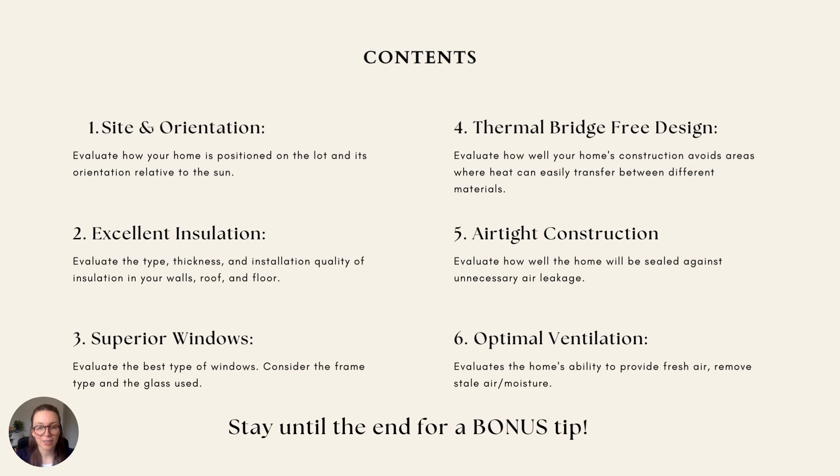The first key principle I want to talk about is site and orientation. It refers to the placement of your home's location on the site and the relationship to the sun and the prevailing winds. There's some key factors that you'll need to evaluate, such as shading, the prevailing wind direction, and opportunities for passive solar heating over winter. You'll also need to consider natural ventilation and cooling in summer.

The strategic placement of your home can dramatically impact its energy efficiency. Facing windows to the sun will capture the winter sunlight for warmth, while well-placed eaves and shading devices can shade your home from the hot sun during summer. The prevailing winds can be used to naturally cool your home. Analysing your site is crucial for a sustainable design, and that is why I start here first.

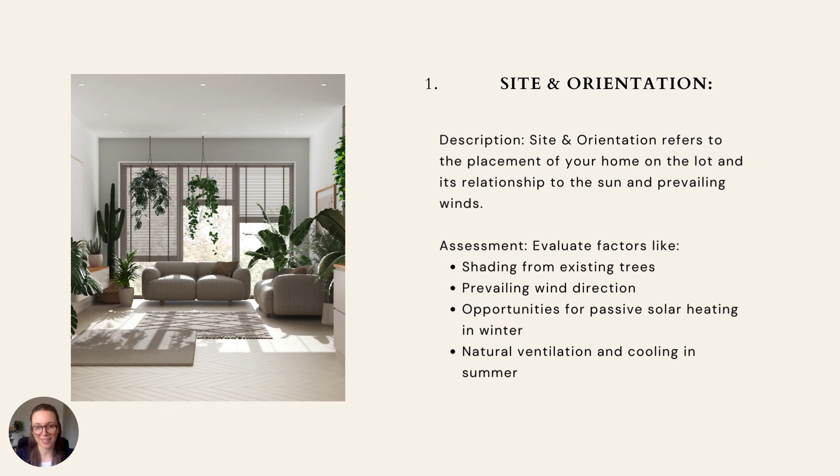When we think about site and orientation, there's some key questions I want you to ask yourself. Where does the sun rise and set in relation to the rooms in my home? How does that change from summer to winter? Is there any shading from existing trees?

Now, this can be something that's a good thing because the shade in summer can block the hot sun from coming into those rooms. However, too much shading in the wrong location in winter can mean that you're not getting any sun into the home. This can lead to a home that's feeling quite cold throughout the year.

There's a type of tree called a deciduous tree, which means that it drops its leaves in wintertime, compared to an evergreen tree, which keeps its leaves all year round. Deciduous trees can be ideal energy efficiency devices. They can be placed in a location where they can block the summer sun when they're full of leaves, and then they'll drop their leaves ready for winter to allow the winter sun to come inside.

Even an apple tree or a cherry tree are examples of deciduous trees, which not only provide the shading in summer and the sunlight in winter, but also give us delicious fruit as well.

It's also good to consider what the prevailing wind direction is. If we can optimize the location of windows in the home, then we can allow them to be open to receive the cooling breezes in summer. This gives us some extra thermal benefit because it means that we don't have to spend money on using an air conditioner to cool our home over summer.

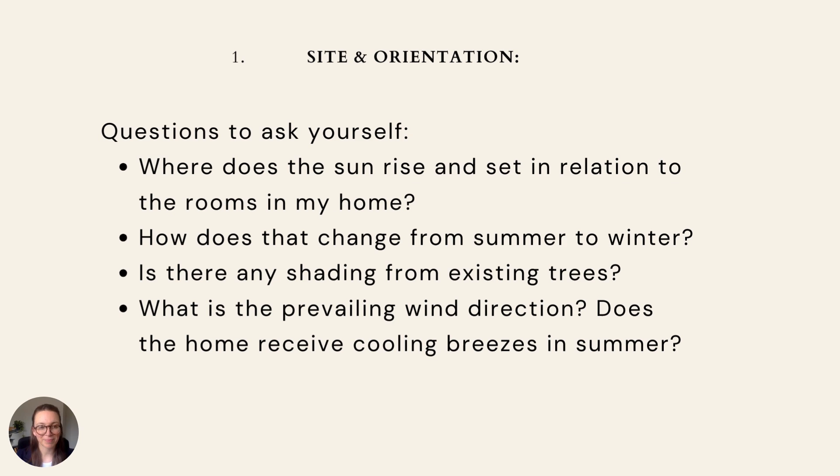The next principle I want to talk about is excellent insulation. This is crucial for maintaining comfortable temperatures inside your home. There's many different types of insulation, and so I'm going to cover some of the key principles here. The main one I want you to think about is called the R value, which is a measure of the resistance to heat flow. All insulation has an R value. In fact, everything has an R value, but we use the metric of R value to measure the insulation levels. Higher R values equal better insulation.

You need to look for potential gaps or holes in the insulation. Where there's too many gaps, that actually has an effect of lessening the impact of the insulation. These gaps mean that the heat or the cool you've created inside your home is allowed to transfer out, which we don't want. Ideally, we want your home to perform like an esky.

An esky in a hot Australian summer is taken down to the beach, and it allows us to keep our drinks cool inside while it's hot and scorching summertime temperatures outside. And then at the same time, if you take that thermos and you put a lovely hot chocolate in there in the middle of winter, then the thermos actually acts as a way to stop that cold temperature from outside coming in and cooling down your hot chocolate. This is exactly the same kind of insulation principles that we want to include when we're thinking about this in our home.

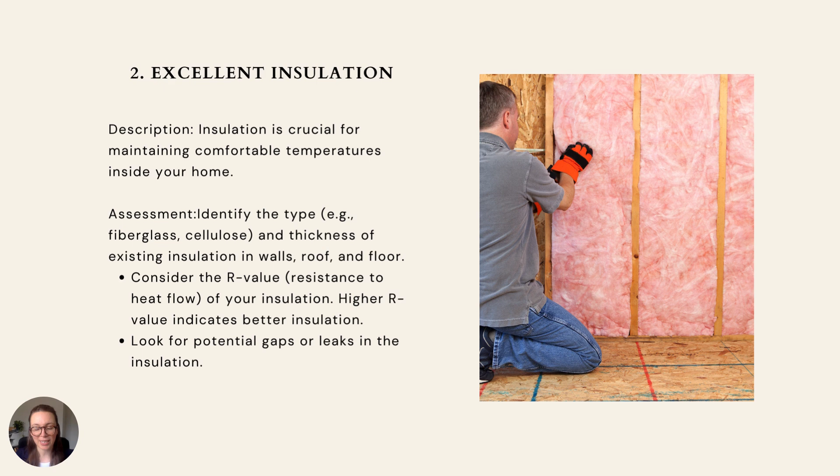Ideally, it's really important that the insulation is continuous, meaning that we're trying our best to get a continuous line of insulation from the floors, the walls, and the ceiling all around us, in the same way that if you cut an esky straight through the middle, you'd see that wall of insulation, floor of insulation, and then the ceiling of insulation, keeping whatever you've got inside hot or cold as it's required.

Ceiling insulation is so important because, as we know, heat rises. So the heat that we're generating inside our home is going to rise up, and that will come to our ceiling. So the most benefit we're going to get from topping up our insulation is going to be at the ceiling point.

The next, perhaps more expensive option might be to look at improving wall insulation. I had a great question come in about this recently from a client, and they were asking how to do wall insulation in their existing walls.

As I said, it's hard to do unless you're looking at taking off some of the plasterboard internally, because you need to get access to the structure, or unless you're looking at taking off the external cladding of the home so you can get a good level of access to the wall frame to be able to install that insulation retrospectively.

And then the third most expensive option I want to talk about here is subfloor insulation. Now, it's not always true that it's going to be the most expensive option. However, I've included it in this case because I believe that the subfloor insulation can be hard to access. So that means that trades may charge you more for subfloor insulation installation. You need a certain amount of clearance underneath your house to be able to install insulation.

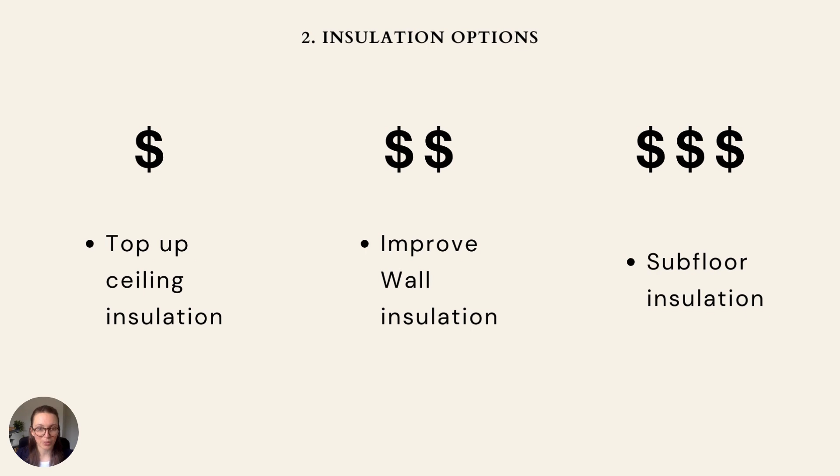Now, the next principle I want to talk about is superior windows. Windows play such a significant role in managing the heat gain or loss. I always say to my clients that you need to think of windows as holes in your wall, because that's essentially what they are in terms of thermal performance. They are a hole in your building fabric, an area where you can't get the insulation that we talked about in the previous slides. So the performance of the windows becomes even more important.

Windows are absolutely beautiful and so important in architectural design. But where they are placed and how big they are sized has a huge impact on how sustainable and energy efficient and comfortable the home will be. So I believe it's so important to think about how we are designing our windows and make sure we design them in terms of size and placement, to think about where the sun's going to be coming into the house throughout the day, where the views are going to be located, and also which height we will be looking at the views.

For example, if you're sitting at a desk all day and you want to have a window in that room, that's a different height to if you were looking at a room where you might be standing most of the day. There's different views that you'll get from your eye level to be able to connect yourself to the nature outside. It's so important to have beautifully designed windows. It's one of my favorite things to talk about.

The key aspects in terms of energy efficiency of windows is to think about the frame material. So there are many different types of frames. One common one that we see in Australia is aluminium frames. Single glazed aluminium window frames are not a good option for windows, and it's unfortunate that we still see them being installed in Australia and in some other countries as well. These type of windows are not very good at keeping the internal air temperature at an acceptable level. The reason is mostly because of the frame material itself.

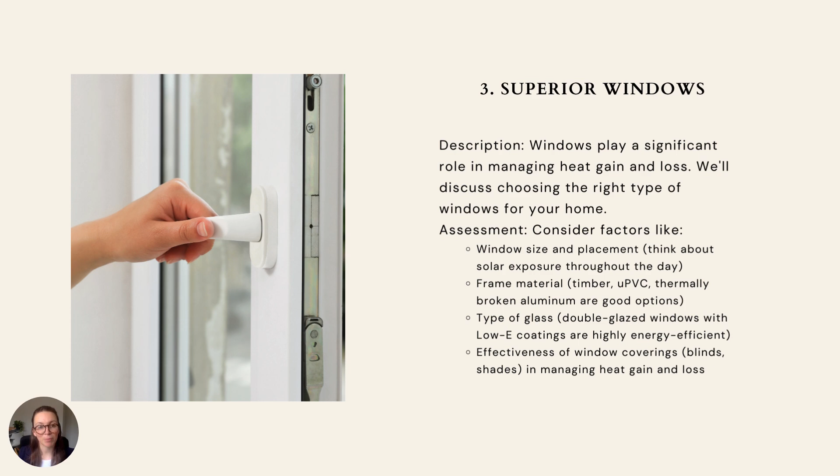Some other things to think about would be different types of blinds and shades that may help to insulate the window, such as honeycomb blinds. And when we talk about shades, we're looking at external shades, because our main thing to do in summertime is to make sure that we don't have the sun hitting the glass. When the sun hits the glass and gets into the house, then it's going to be heating up the internal environment. Ideally, we want something that's shading the glass on the outside. That could be a shade that rolls down or rolls out to protect and block the sun. Another option, as we talked about before, is the placement of deciduous or shaded trees that block the sun coming in summertime.

Let's talk now about a few of the different levels of window options and how they might be affecting the different prices. So, as I mentioned just previously, one of the cheapest options you can do is adding pelmets and heavy curtains to your window frame. Now, when we think of pelmets and heavy curtains, we might think of a more heritage style home. However, there are contemporary ways that we can bring in these elements. It's essentially going to create that layer of insulation on the window, as I said.

The next thing I want to talk about is improving the window frames. That will increase the cost of the windows. Looking at timber windows or UPVC. UPVC is something that's growing in the Australian market. It's very common, I know, in Europe and America. These options allow the window frames to have a good level of insulation, meaning that they won't be transferring the heat from inside to outside as quickly.

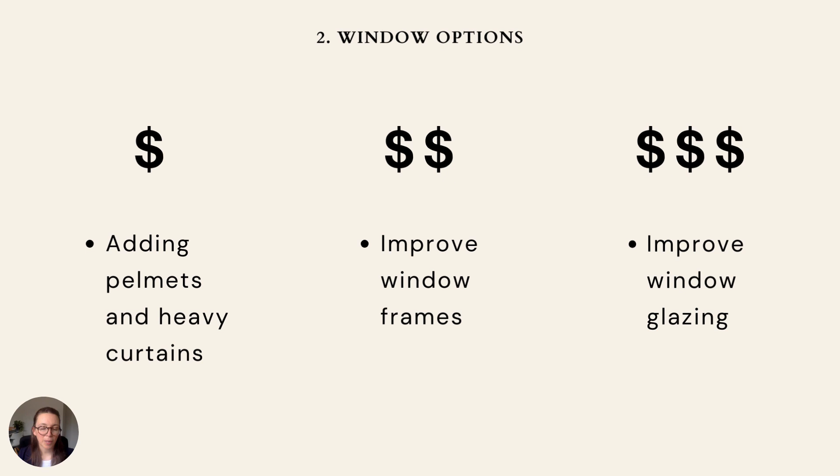And then finally, perhaps the most expensive option here is to look at improving the window glazing, going to double or potentially triple glazing in some climates. There are some other options to consider here, such as secondary glazing, which is about 1/3 the cost of double glazing, where additional perspex elements are attached to the window frames. That may be something to consider for your situation as well.

Next, I want to talk about thermal bridge-free design. These thermal bridges are areas in your home construction where heat can transfer between different materials. We've talked about this already. It's a little bit of a physics lesson today. We really want to minimize the heat transfer through considering thermal bridge-free design in the way we're looking at constructing or retrofitting our homes. Thermal bridges can create energy leaks, and so by addressing these areas during construction or renovation, you can significantly improve your home's thermal performance.

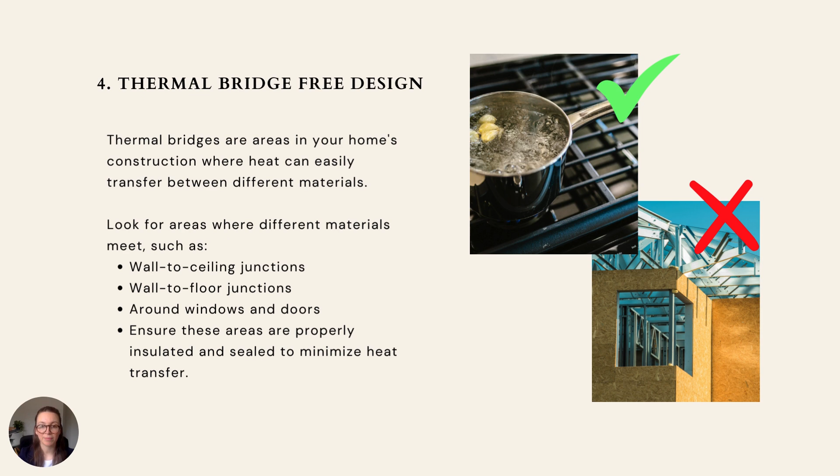Proper insulation and sealing techniques around any thermal bridges will help to prevent them from transferring the temperatures outside to the temperatures inside. It's really important that we consider the use of aluminium and steel. These can be used in the home design, but it's really important to think about where they're used and to make sure they are thermally isolated. They're both materials that transfer the outside temperatures to inside more quickly than perhaps timber, for example.

Next, I want to talk about airtight construction. A well-sealed home is crucial for optimal performance. Addressing air leaks reduces your heating and cooling needs, it saves you money, and it's creating a more comfortable environment to live in. It's really important to evaluate how well the home will be sealed against unnecessary air leakage.

By that, I mean that when you have air inside your home, it's not escaping through gaps and cracks that really don't need to be there. One of the concerns about air leakage or perhaps air coming in from these gaps and cracks is it may be coming from spaces that are not necessarily outside natural air. It may be coming from the wall cavities or from the ceiling spaces.

What's concerning about this is that there is a level of dust, there's a level of rodent droppings, there's probably rodent carcasses, any sorts of things that could be stuck within the wall cavities or in the ceiling cavities. And so if we are pulling air from those areas into our home, that's going to affect our indoor air quality.

When we think about bringing in air to the home, we want to make sure that it's air that's coming from outside. It's natural air and air that's going to be fresh. That's so important for our health. So it's really good to seal up any unnecessary gaps or cracks with caulking material. Pay particular attention to the seals around windows and doors. They are notorious spots for air leakage coming into the home.

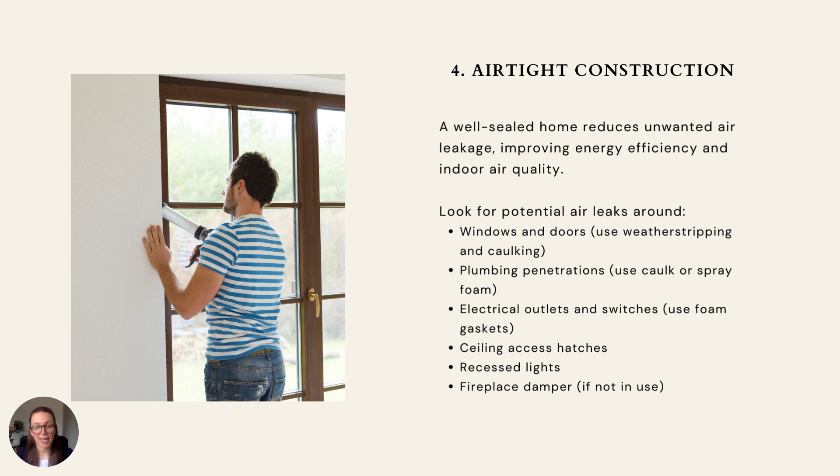Now we are creating homes that have much more efficient technology in how they're going to be heated, and they don't need this level of leakiness anymore in order to be efficient. They're essentially assisting us to create a healthier indoor air environment than a fireplace would, for example.

Finally, I want to talk about optimal ventilation. This links to the previous topic because it's so important that we have fresh air that's coming into our home. Our home is a source of stale air and moisture-filled air that can build up when we're cooking, when we're showering, from the toilets, from any internal breathing that we're doing, essentially. As we're breathing out this carbon dioxide, we need to make sure that we are pulling those contaminants out of the air and providing fresh air circulation.

There's no reason why we should have to live in homes that have stale, moisture-laden air. So it's really important that we can focus on these principles for optimal ventilation. I'm always going to promote natural ventilation first. In Germany, there's a principle where every day they will open their homes for a few minutes to let that fresh air in, even in the depths of winter.

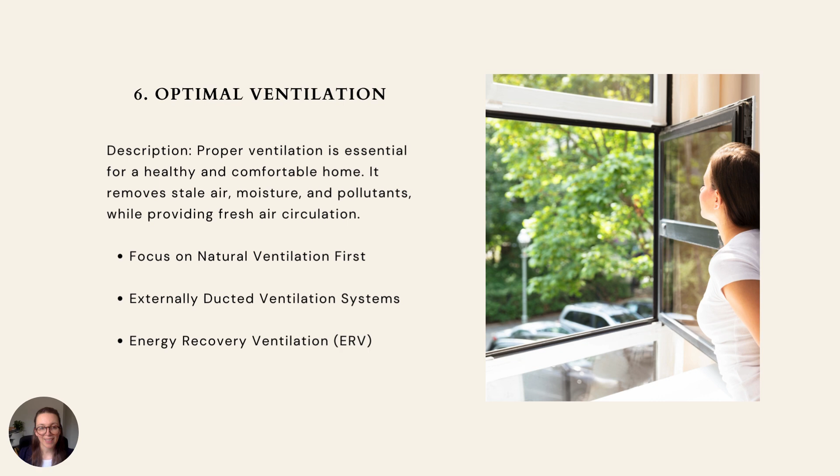And I love this principle because it just allows the air in the whole home to essentially be swapped over for fresh air and ensures that there's no buildup of moisture or stale or stagnant air in the home. Then you can look at different types of systems, which I'll cover a bit more on the next slide.

There's also some systems which are called continuous extraction. They are essentially running a small fan all the time, which is pulling the stale, moisture-laden air out of the home. And that can be accompanied with trickle vents or specially detailed openings, which will allow for fresh air to come into the home. As I said previously, we don't want to get any of that air coming into the home from our wall cavities or our ceiling spaces. We want to make sure it's fresh outdoor air. And this is one way that we can do that when we're using a continuous extraction system.

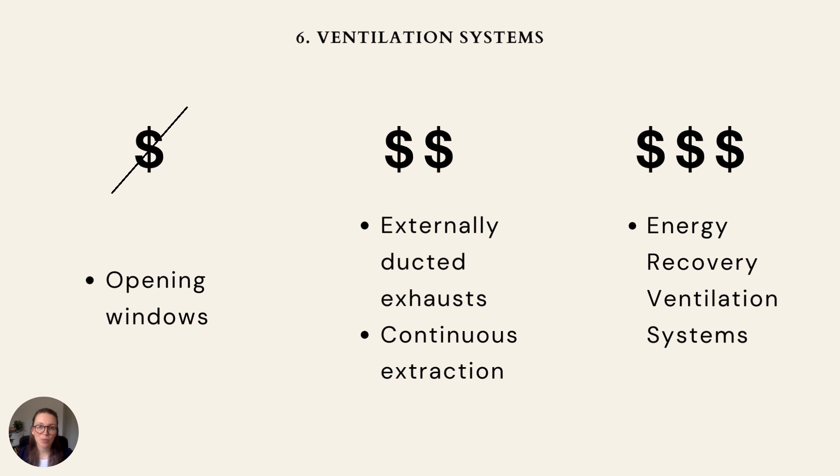There's also different types of systems you can use. Some are balanced around the whole home as a centralized system, and others are decentralized, meaning they're different units around the home that are pushing and pulling the air. These systems can also work really well in some cases.

And then the final bonus step that I wanted to mention here, for those that stayed all the way through those first 6 steps, is going all electric. So embracing energy efficiency can be done on top of adding all electric appliances. Now the technology has advanced so much that it's very efficient to use all electric appliances in your home. You can do this for your cooking through induction cooking systems, through your heating systems, through instantaneous heating systems or storage systems connected to a heat pump.

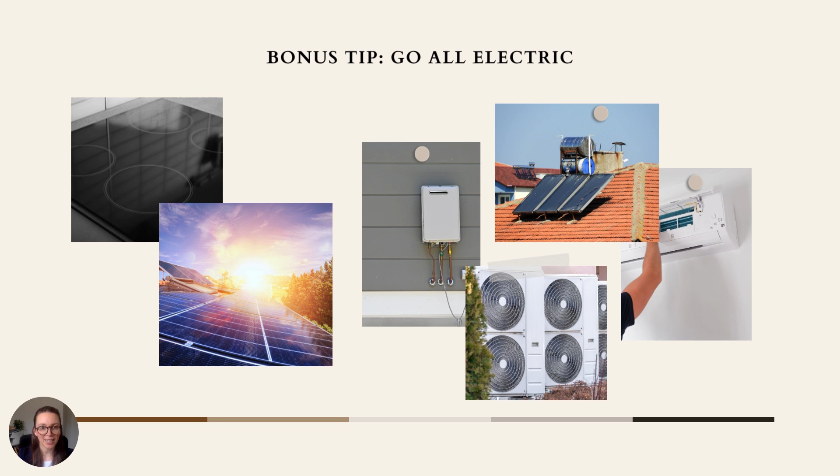And then you can look at different types of solar storage systems connected to heat pumps as well and storage tanks. And then for heating the home internally, a heat pump reverse cycle air conditioning system can be really effective for heating and cooling your home. On top of that, then you can add a PV system. And I'll show you how you can build that up here in the next slide. So I've put these appliances in order of what will be the most effective in terms of the thermal performance in your home and also cost effective.

And the first one I want to talk about is your heating system. The reverse cycle air conditioning, heating and cooling systems are going to be the most efficient all electric way to heat and cool your home. Some of my clients talk to me about whether they should install ducted systems. And I don't necessarily recommend ducted systems because if we go back to a few slides earlier, ducted systems can actually contribute to air leakage in the home. As much as we would like the ducts to all be neatly installed and make sure there's no air leakage, that's not necessarily the case.

So I think it's really important to look at simple units that are reverse cycle air conditioner systems. The way that I design a home when I'm thinking about this is to put about 2 systems around the home and allow them to push the air around the home.

I also think about ways that you can zone the home and different areas to be heated. I've practiced this myself, even in the rental that we're living in currently, and I've found that it works quite well as long as you're achieving a decent level of air sealing in your home to start with. If you've got a leaky home, then when you are putting this hot air into the home, it's just going to be evaporating, going out everywhere through the gaps and cracks. So I do not recommend that.

Then with the hot water system, heat pump storage systems are becoming more and more efficient and popular and coming down in cost. I highly recommend going to an all-electric heat pump system for your hot water. It's a bit different to some gas systems we have. Gas systems tend to be instantaneous, meaning that you will turn on the tap, the gas will ignite straight away, heat up the water and put it in.